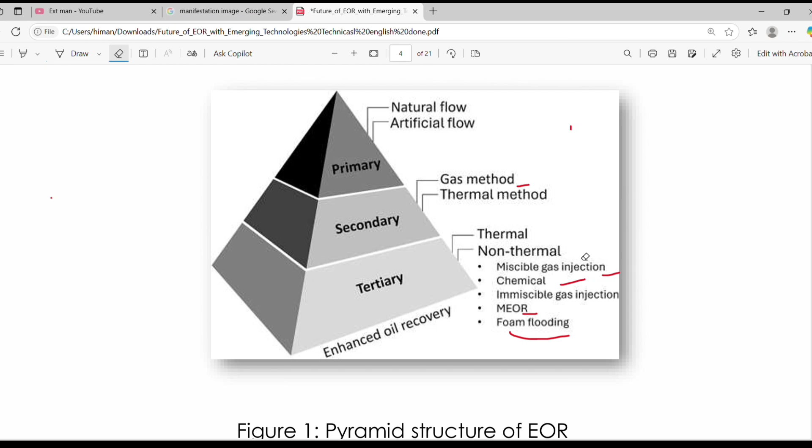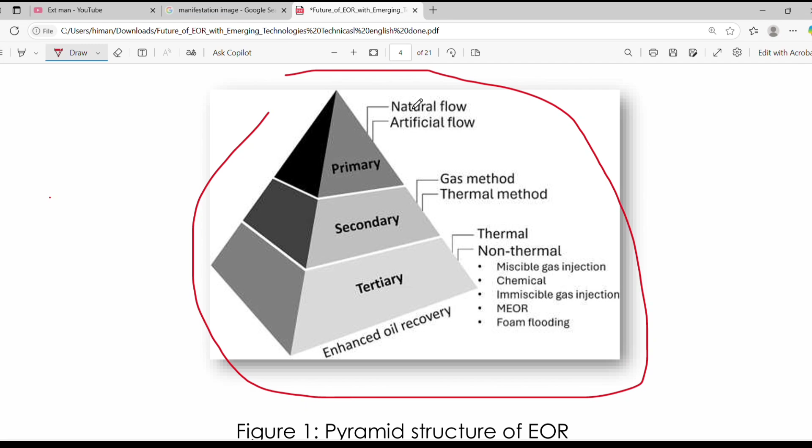So you can see this is a pyramidal structure. At the very bottommost part, it is regarded as tertiary. In the middle part, we can see it is secondary. And at the topmost part, we can see it is primary. So this is basically a pyramid structure of enhanced oil recovery.

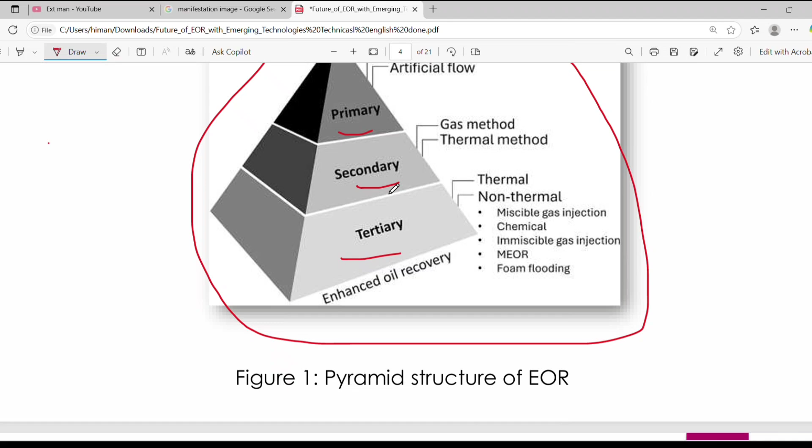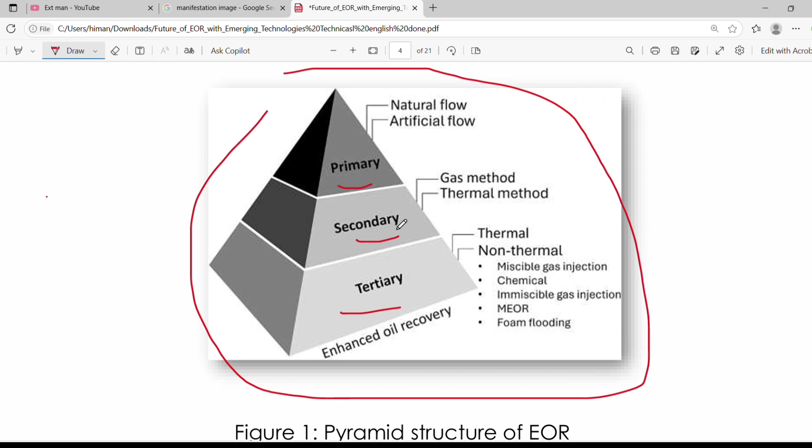There are changes, and this is not the significant categorization of the enhanced oil recovery structure or recovery methods like primary, secondary, or tertiary, because now enhanced oil recovery falls under IOR, that is improved oil recovery. That is another concept which we are not going to talk about in this session. So let's keep it simple.

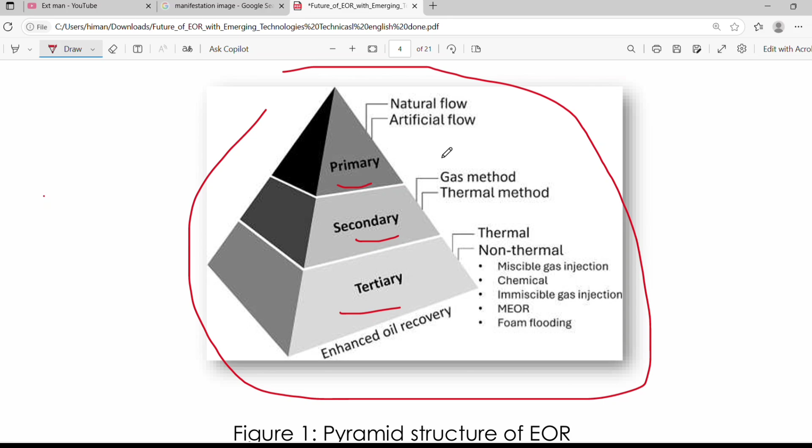The structure of EOR: oil recovery can be categorized into three types: primary, secondary, and tertiary. In the primary, it is basically a minimal amount of oil recovered through natural systems of pressure without any external factors or systems. Since it is minimal recovery, the primary recovery rate is usually about 10% to 20%.

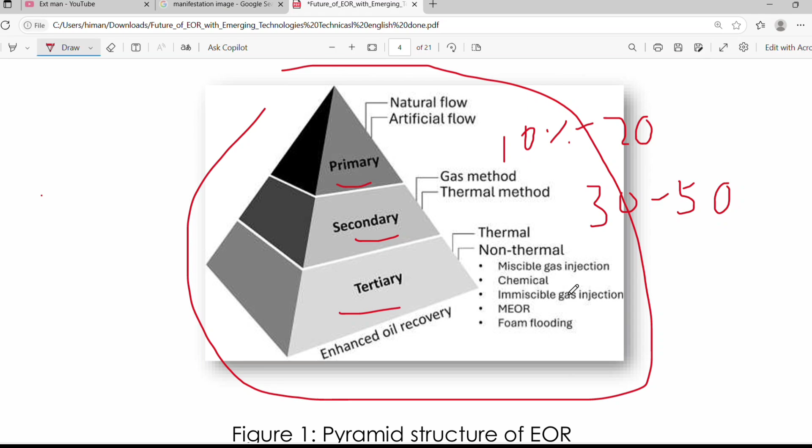In the secondary, it is more than primary but less than tertiary, that is 30 to 50%. And in the tertiary, that is the enhanced oil recovery, it is about 60 to 70%. This is the most advanced form.

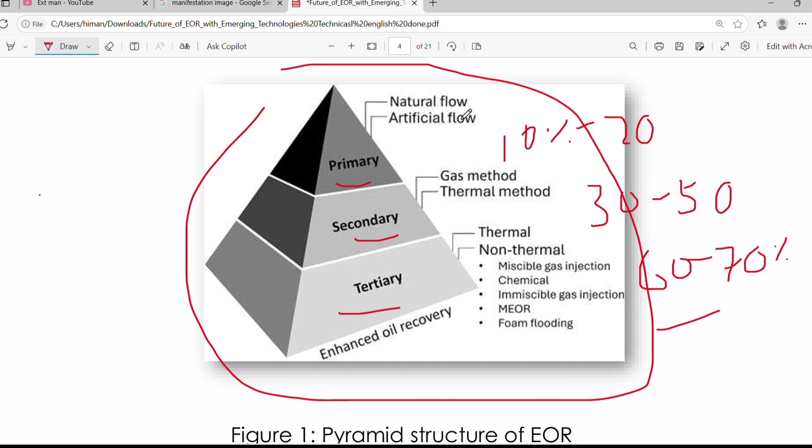In the primary, none of the external factors are used for recovery, it's due to natural or artificial flow. But in the secondary, certain types of methods are used, though usually not as advanced as tertiary. So gas method and thermal method are some types of secondary methods used in secondary recovery.

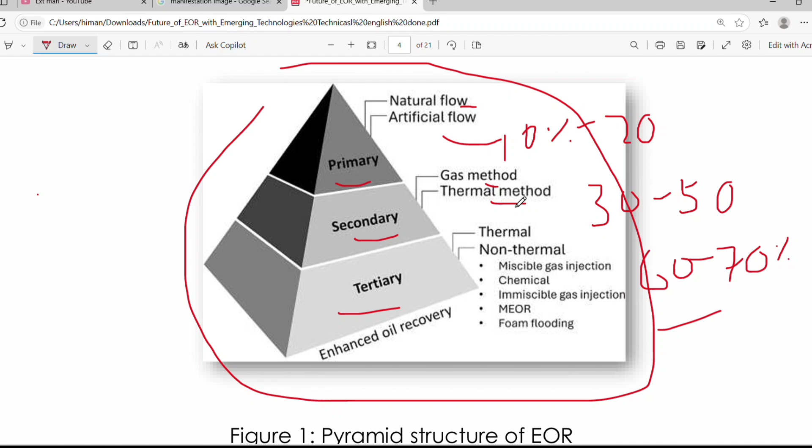In the tertiary, there are two subcategories: thermal methods and non-thermal methods. Talking about non-thermal methods, we have miscible gas injection, chemical injection, immiscible gas injection, MEOR (microbial enhanced oil recovery), where microbes are used to increase the rate of recovery. Foam flooding is another type.

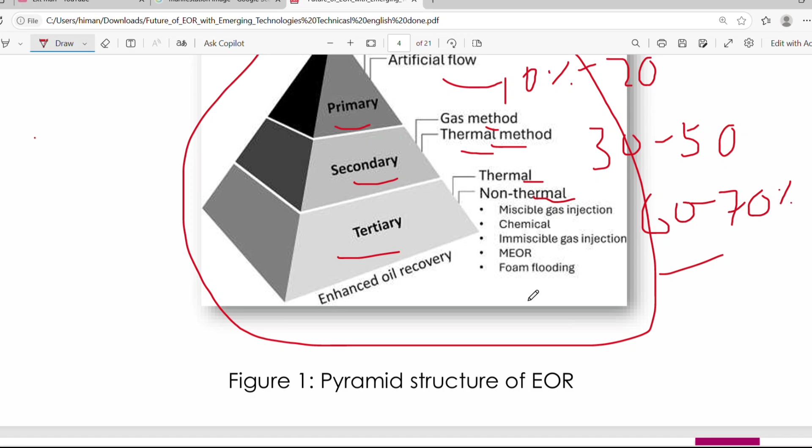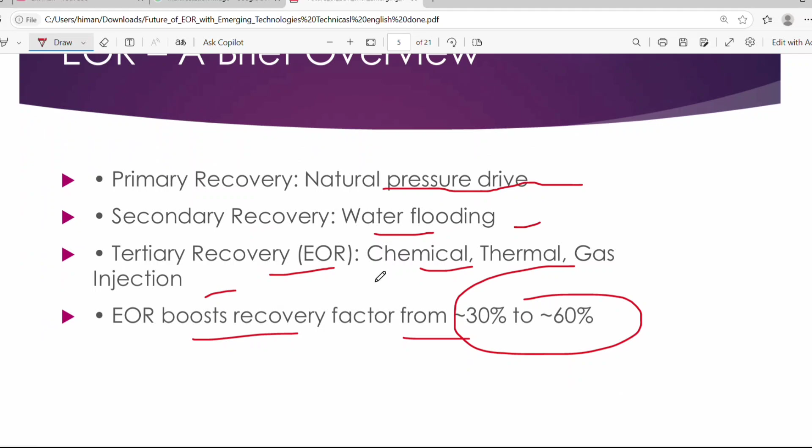A brief overview: primary recovery is natural pressure drive; secondary recovery is water flooding; and tertiary recovery, the enhanced oil recovery, uses different techniques like chemical injection, thermal injection, and gas injection.

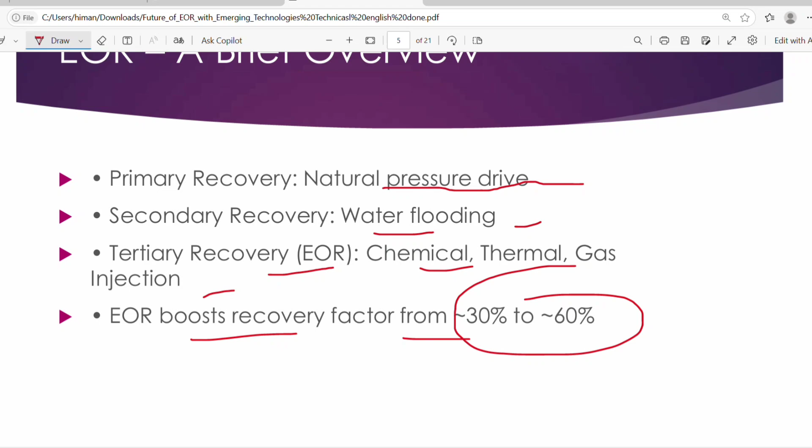EOR boosts the recovery factor from 30 to 60%. When enhanced oil recovery is used, it usually boosts the recovery factor from about 30% to 60%, compared to primary at about 10 to 20% and secondary at about 30 to 50%, but enhanced oil recovery increases it up to 70% recovery rate in EOR.

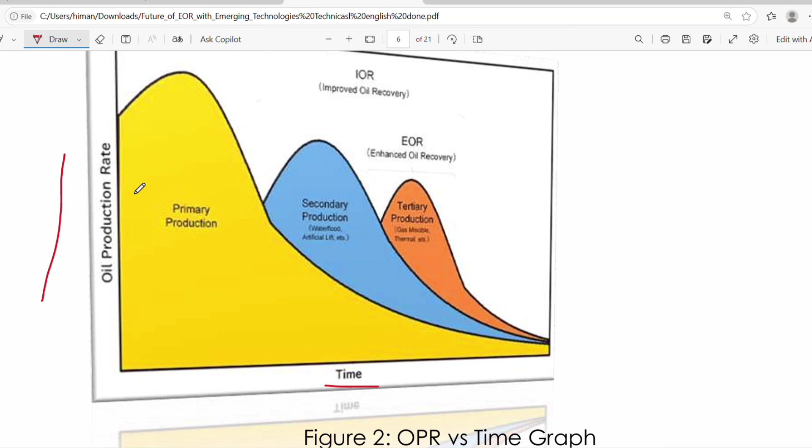This is basically a production rate versus time graph, where the x-axis is time and the y-axis is oil production rate. This graph shows how, with time, the primary production reacts compared to the secondary production. So IOR means improved oil recovery and EOR means enhanced oil recovery.

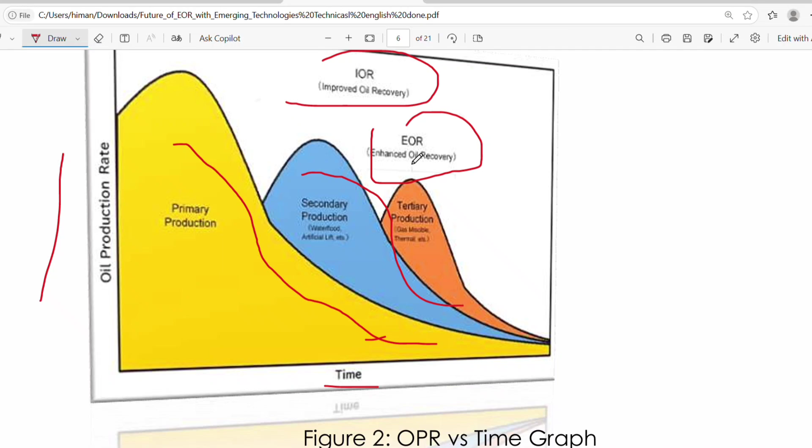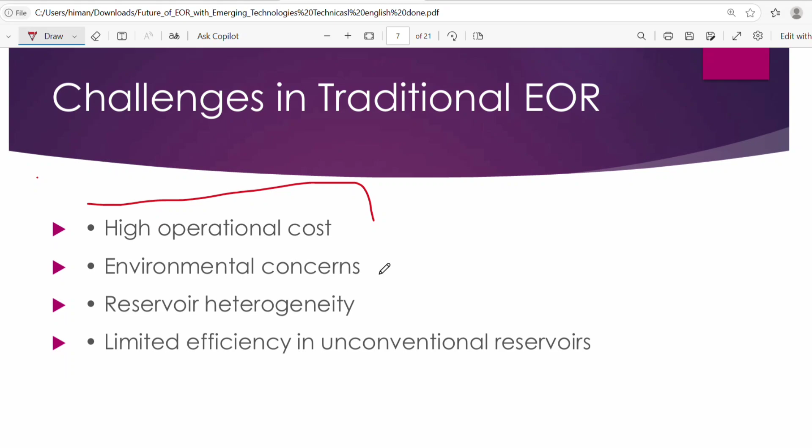Now, since everything has some challenges and drawbacks, since anything with an advantage could also have a disadvantage, enhanced oil recovery has not been spared either. It has some challenges too, like high operational cost, since EOR includes several advanced methods, making it costly.

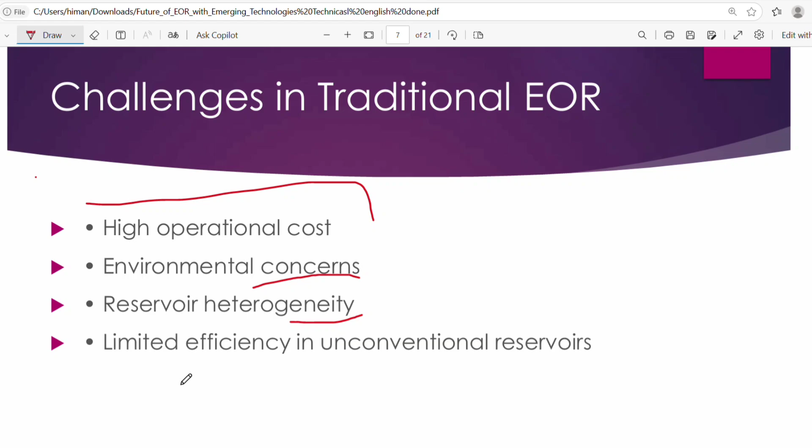Environmental concerns are there too, with different types of issues arising when we talk about EOR, along with reservoir heterogeneity and limited efficiency, especially in unconventional reservoirs. First was money, the challenges, second was global warming, which is environmental.

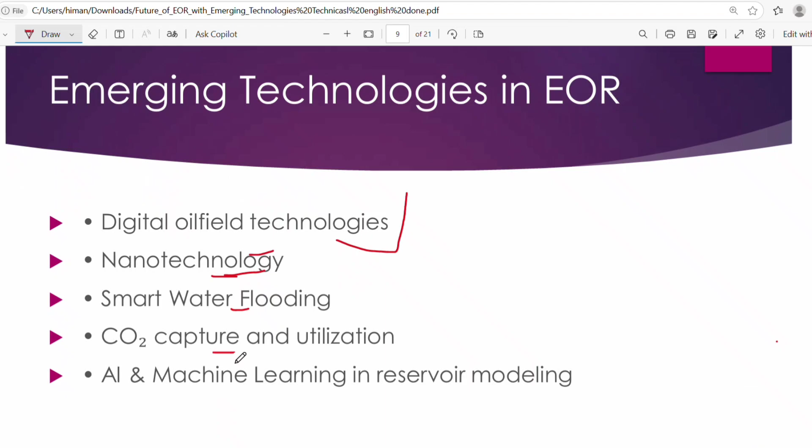Now there are certain emerging technologies used, like digital oil field, nanotechnology, smart flooding, water flooding, CO2 capture utilization, and even AI and ML are also used nowadays. These are the emerging technologies.

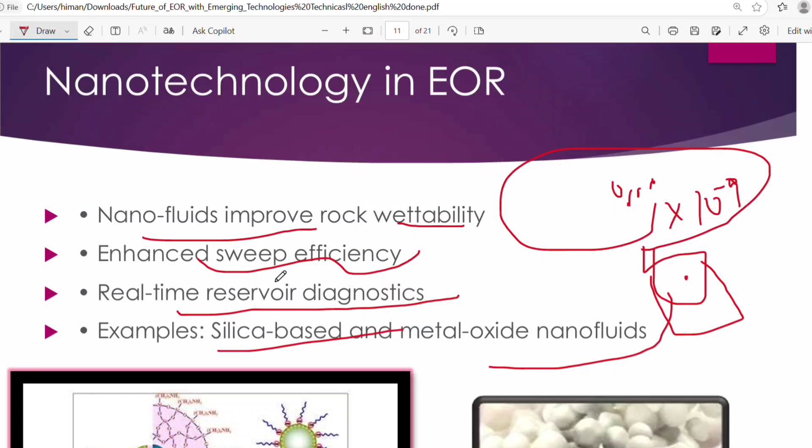Nanotechnologies and nanofluids improve rock wettability and hence sweep efficiency, allowing real-time reservoir diagnostics. Examples of nanotechnologies are silica-based and metal oxide nanofluids. Nanotechnology basically means tiny nanoparticles with size up to 10 to the power minus 9. These small nanoparticles are injected into rocks to improve rock wettability and enhance sweep efficiency. Some examples are metal oxide or silica-based nanofluids, as you can see in the following figures.

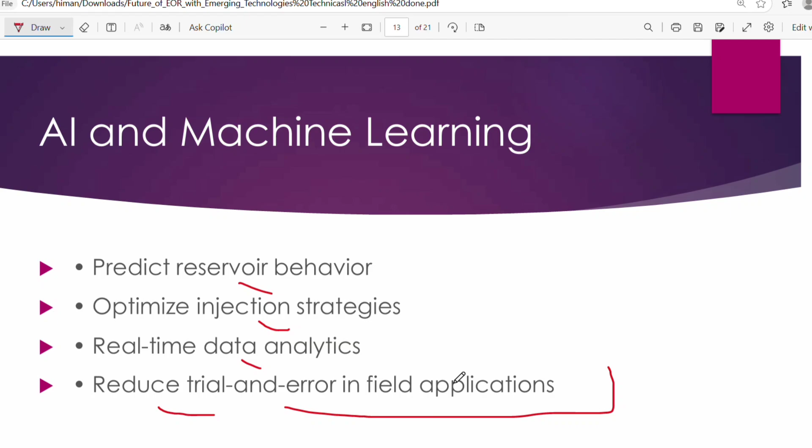Talking about another emerging technology, advanced technologies used are AI and machine learning. Everything now uses AI, and similarly in the enhanced oil recovery process, AI and machine learning are also present. They basically help predict reservoir behavior and optimize injection strategies. They provide real-time data analytics and reduce trial and error in field applications.

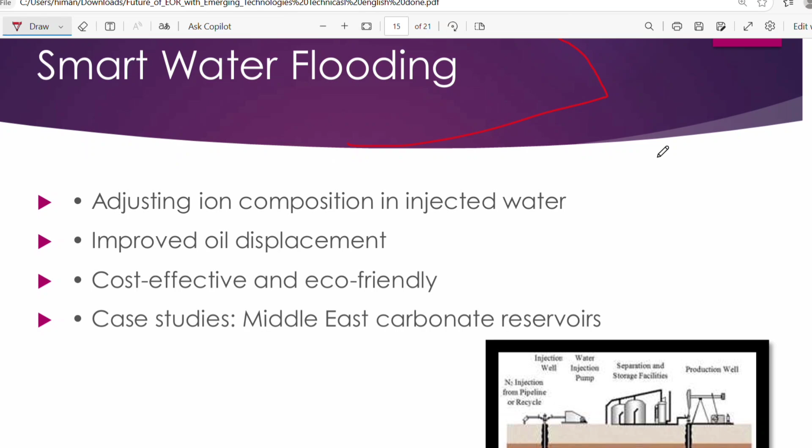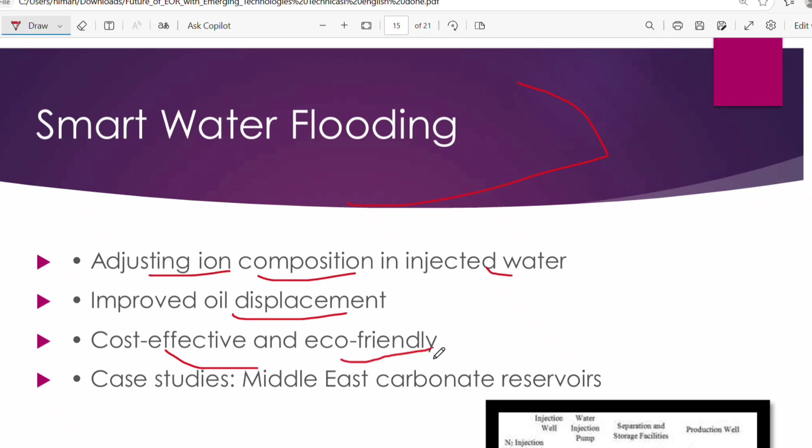Smart water flooding is another advanced technique used under tertiary recovery. It is used for adjusting the ion composition in injected water, improving oil displacement, and it is cost effective and eco-friendly too. Talking about environmental concerns, case studies from Middle East carbonate reservoirs. This is one diagram depicting how smart water flooding occurs. I hope it is visible, so you can get a basic idea of it.

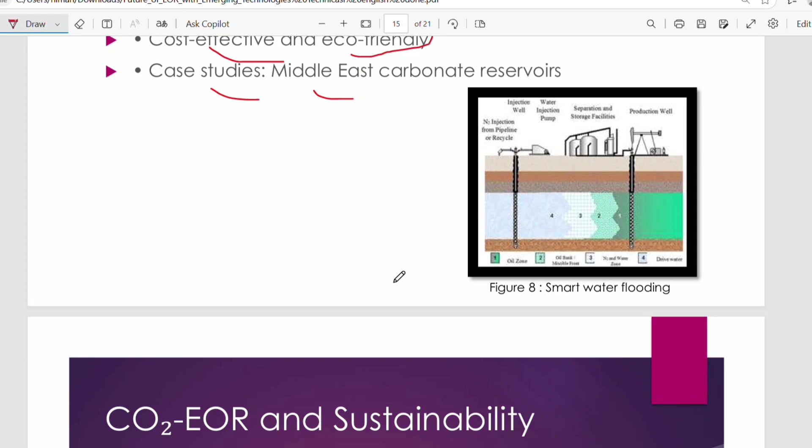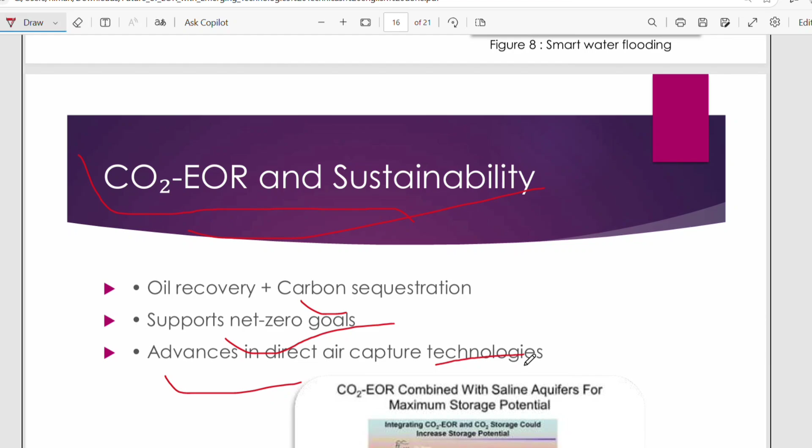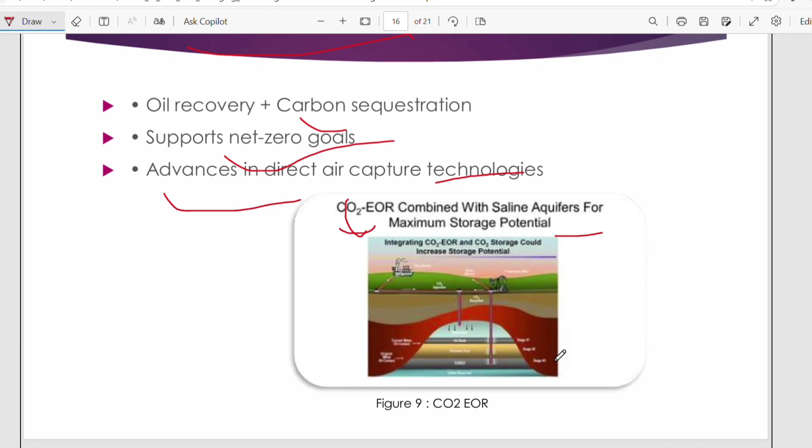Then we have CO2 EOR, that is carbon dioxide enhanced oil recovery, and its sustainability. Oil recovery plus carbon sequestration is achieved. It supports net zero goals and advances direct air capture technologies, like CO2 EOR combined with saline aquifers for maximum storage potential. Saline aquifers are a type of water body. This saline aquifer, combined with CO2 EOR, is injected inside to maximize the storage potential.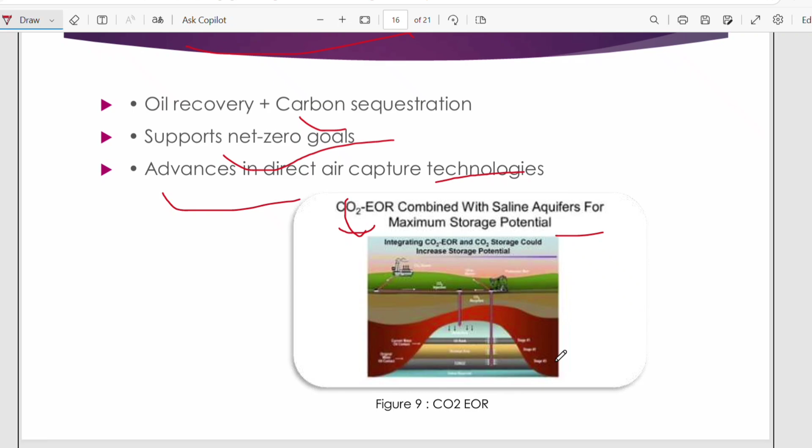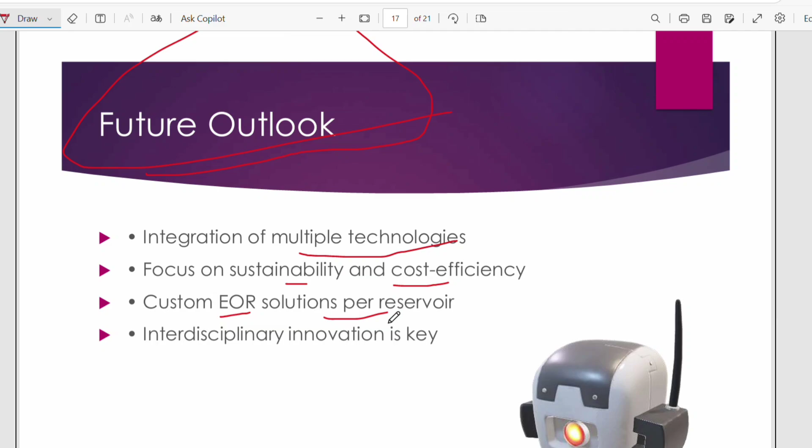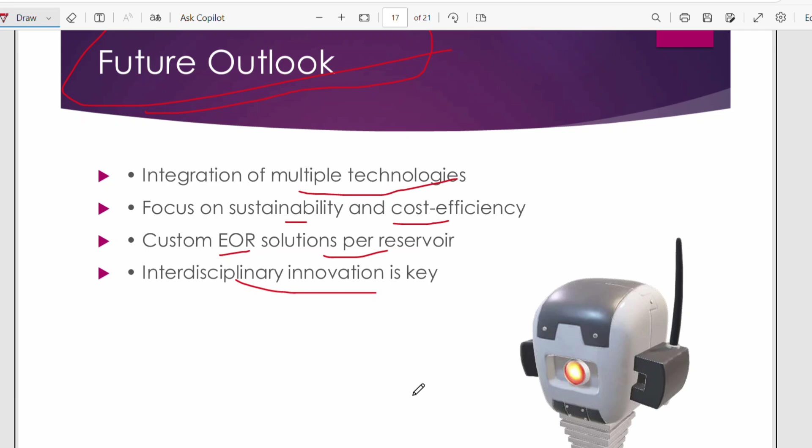Now, what is the future outlook? If we talk about the overall future outlook of enhanced oil recovery, it is the integration of multiple technologies, focusing on sustainability and cost efficiency. Custom EOR solutions per reservoir and interdisciplinary innovation is key. Different multiple technologies will come, and we have to focus on sustainability and cost efficiency, because we do not want a costly method.

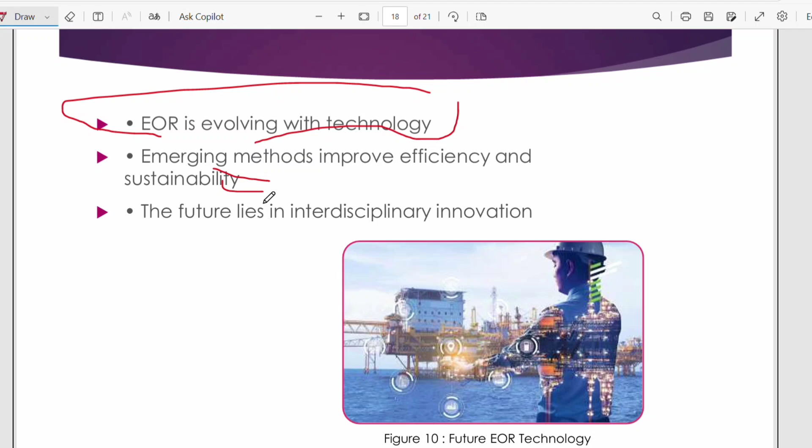So that's the conclusion: EOR is evolving with technology. As technology develops, EOR is also evolving. Emerging methods improve efficiency and sustainability, and the future lies in interdisciplinary innovation.

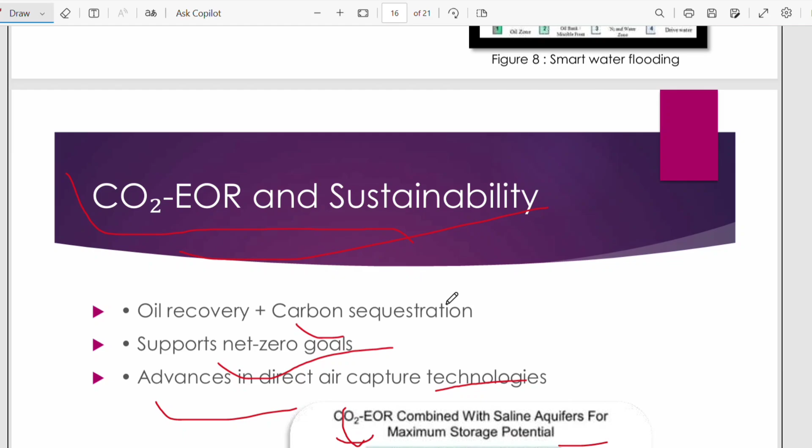So briefly, in 30 seconds, to conclude and give a summary of what I have learned from my experiences giving presentations at different sessions and platforms: enhanced oil recovery is very important for the oil sector because it is the future, and it increases the recovery rate at a very high rate.

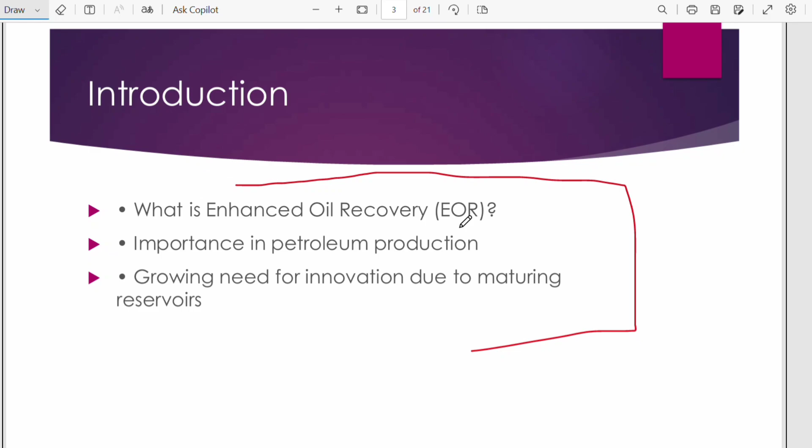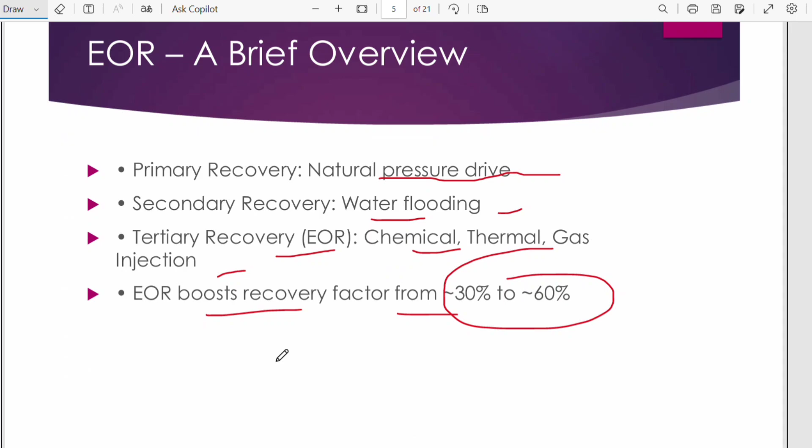But enhanced oil recovery has to evolve with technologies, and since technology is evolving, we have to evolve with it. Enhanced oil recovery is the innovation due to which maturing reservoirs can be used to recover oil. So enhanced oil recovery is very much important.

And as given in the conclusion slide, the future of the oil and gas industry lies in interdisciplinary innovation, like EOR and different evolving or emerging technologies used in EOR, because oil is not going to end. Oil is never going to end, but it is going to evolve. Even if it ends, it is going to evolve or emerge into something different. That's why enhanced oil recovery is very crucial for us.

I hope through this session I was able to help you understand this topic about enhanced oil recovery and its future outlook easily through my narration and presentation.